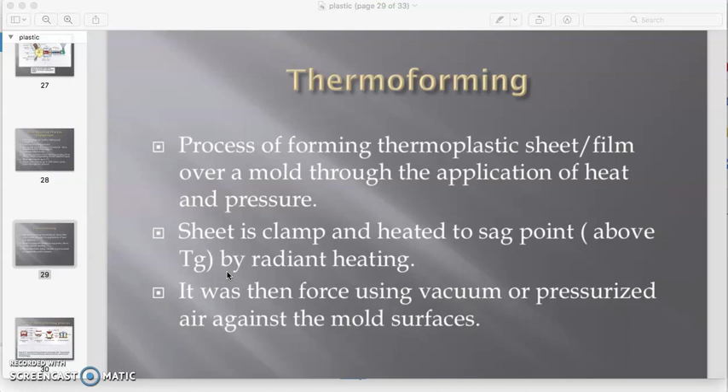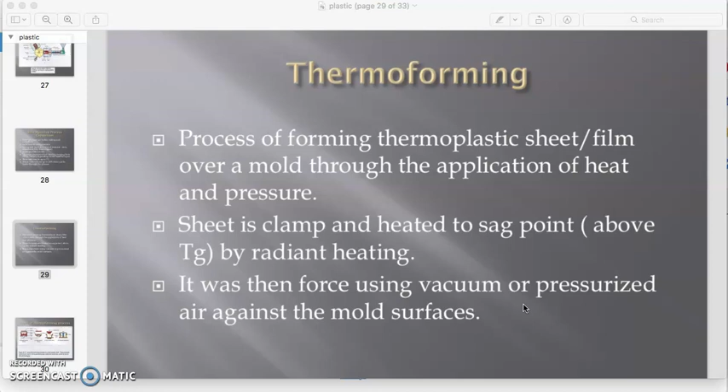And then we also apply the force using the vacuum or pressurized air against the mold surface to duplicate the shape of the mold. Here showing to you the 4 different types of the thermoforming process. Selection of these different methods depends on the shape of your final product.

The first one, you can use the straight vacuum forming, or you can apply drape vacuum forming and also force above the sheet. And the last one is plug and ring forming. So plug and ring forming is usually used for the very simple design of the product.

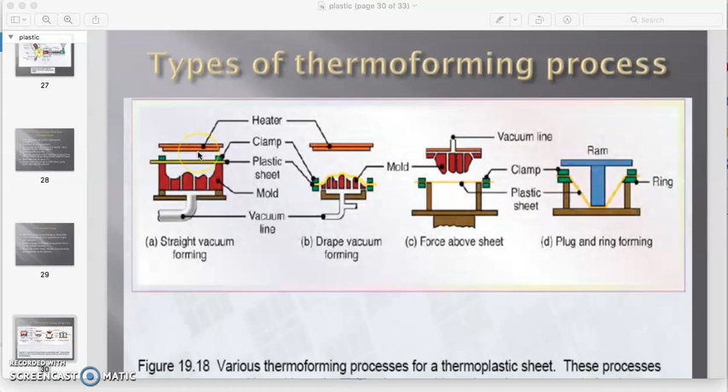Okay, for the straight vacuum forming, the plastic sheet is placed in between the mold and the heater. And then heat will be applied above the plastic sheet to soften the plastic sheet. When it reaches the TG temperature, glass transition temperature, the vacuum will start to apply and allow the plastic sheet to move down and duplicate the shape of the mold.

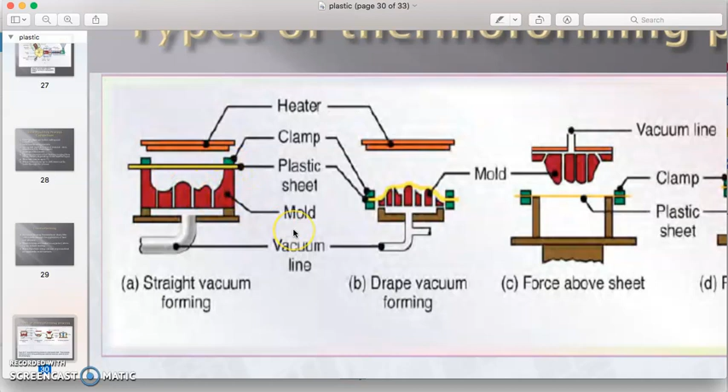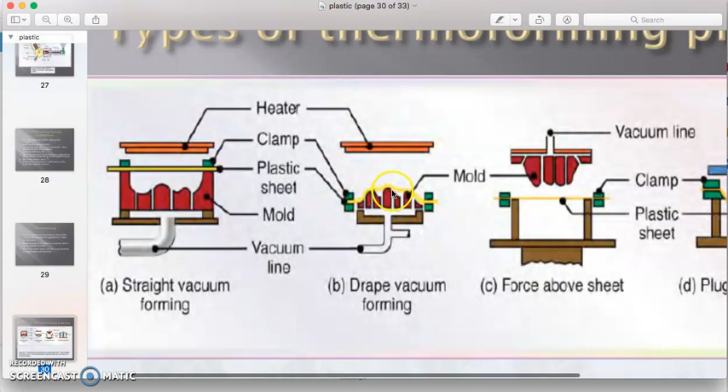For the drape vacuum forming process, the plastic sheet is placed on the surface of the mold, and then the heater is applied above to soften the plastic, and then the vacuum is applied to suck the air and cause the plastic sheet to duplicate the shape of the mold.

And the force above the sheet method, where the mold is placed above the plastic sheet, and the mold will move down toward the plastic sheet, and the heater, the orange color heater, is applied to the mold. So it means that the mold now is a high temperature mold, and then when the mold is in contact with the plastic sheet, it will soften the plastic sheet, and then the plastic sheet will follow the shape of the mold, and at the same time the vacuum is applied.

And for the plug and ring forming, no heat is applied, just a ram is used to move down, and to press and change the shape of the plastic sheet to the required shape.

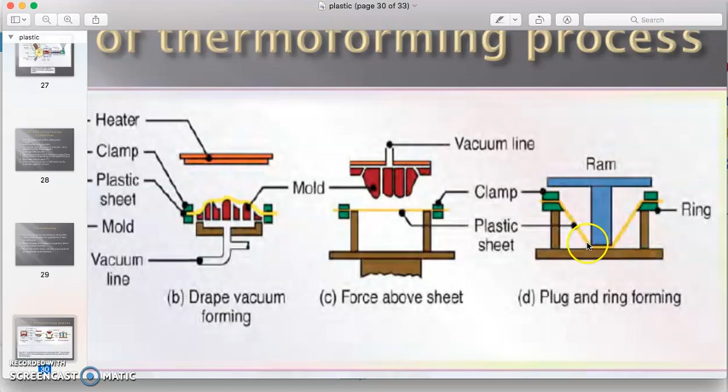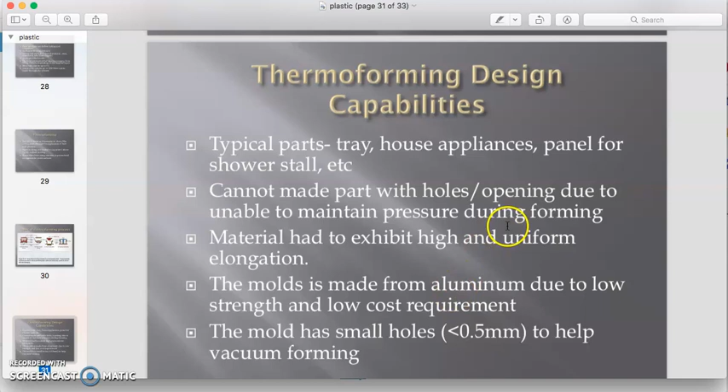Okay, and then for the design capability of the thermoforming process, this process only applies for the production of trays, house appliances, panels for shower stalls, and etc. This method cannot be used to produce holes or any openings because of the limitation to maintain the pressure during forming.

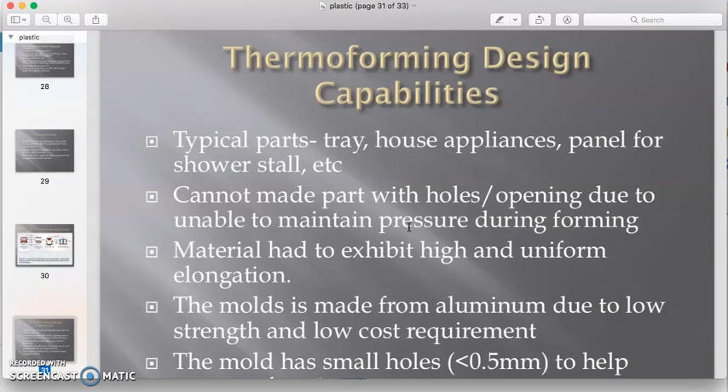Material has to exhibit high and uniform elongation, and the suitable mold for this method is aluminium due to the low strength and low cost requirement. And in the mold, we have to prepare holes of smaller size, less than 0.5 millimeter, for the vacuum forming or suction of the air.

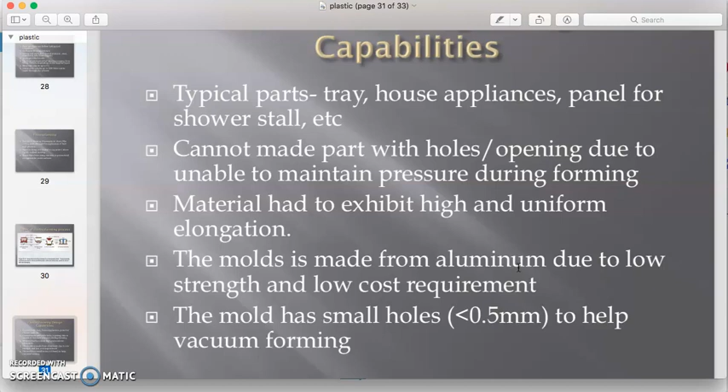Okay, there are potential defects that may occur in this process, such as tearing of the sheet. Maybe we can get non-uniform thickness, improper mold fill, poor part definition, and maybe lack of surface detail.